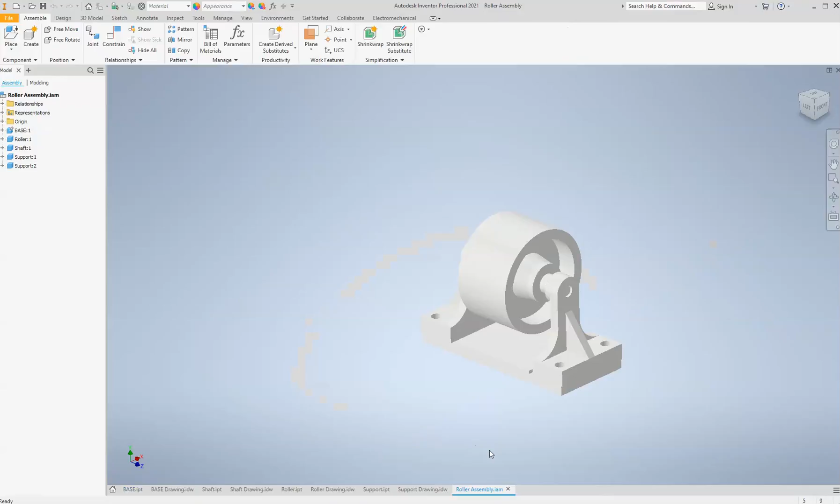We will start with the base of the piece, and we will make a 3-view drawing of this. Then we'll do the shaft, the drawing. We will do the roller, the drawing for that, the support column, the drawing for that, and then finish by assembling it all together. And this will all be done in Autodesk Inventor.

Okay, so we will start here, from the home page. So whenever you open up Autodesk, this is what you'll see. You want to go to new.

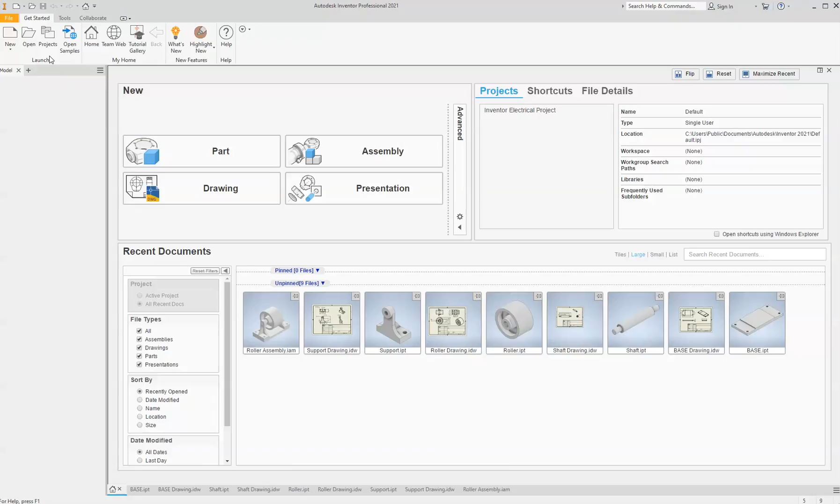To draw a part, you want to use just the standard IPT. The sheet metal has different functions that are not necessary for anything you'll be doing in your class. So whenever we go to assemble everything together, we'll use assembly drawing. Whenever we make our 3-view drawings, we'll use an IDW file.

Okay, so we'll start with standard IPT. You just double click it to open it up. So whenever you first open up an IPT, you'll see a blank workspace here.

The way you want to start most things is you start a 2D sketch. So then you want to select the plane in which you will be drawing your sketch. So the way we will do this is we will start by drawing this face and then extrude it out here and then add 4 holes.

So if we go back to our new part, we will start right here onto this plane. You see it highlights the plane you want. Click it. Okay, so then it takes you here into sketch mode, and you see that it automatically moved us to the sketch settings.

So we want to start here. We will draw a rectangle here that is centered around the origin. To do this, we can go to our rectangle and our drop down tool. We want to start from the center.

So this one, what it will do is allow you to click the center of your rectangle where you want it, which is where the origin will be, and then you can drag it out. And now here you can type in your dimensions. As you can see, it's highlighted that one, and you just press tab to do the other dimension. But we'll just click it down so we can show the dimension tool. So it will just create a rectangle like this.

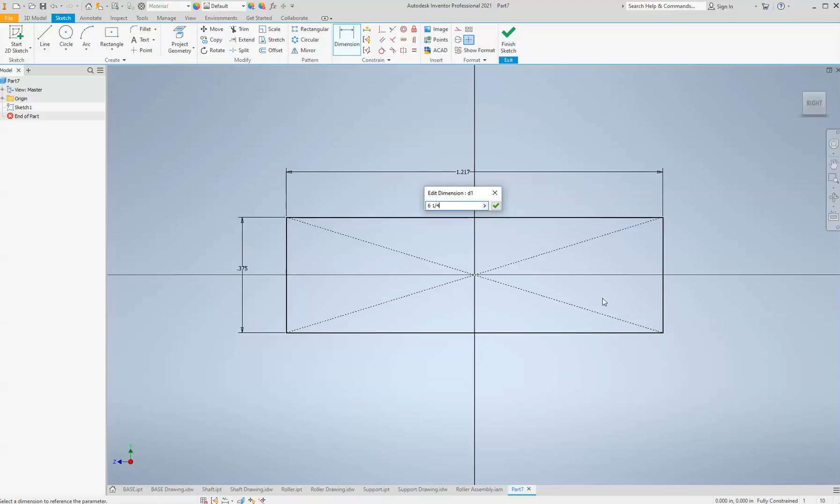This is 6 1/4. So you use the mouse wheel to zoom in and out, and then you hold down the mouse wheel to pan around. Okay, so this is our first square.

Now, what we want to do is add another rectangle on top of this, like this. So now, this will be this piece right here. You can see we're drawing this in right now. We already have the base of it drawn.

Okay, so this dimension here is 3 3/4. And you can do math inside of these dimension tools, as you'll see a lot during this video. 1 5/8. Here's our total dimension. Now, as you can see, it is not centered on this top rectangle.

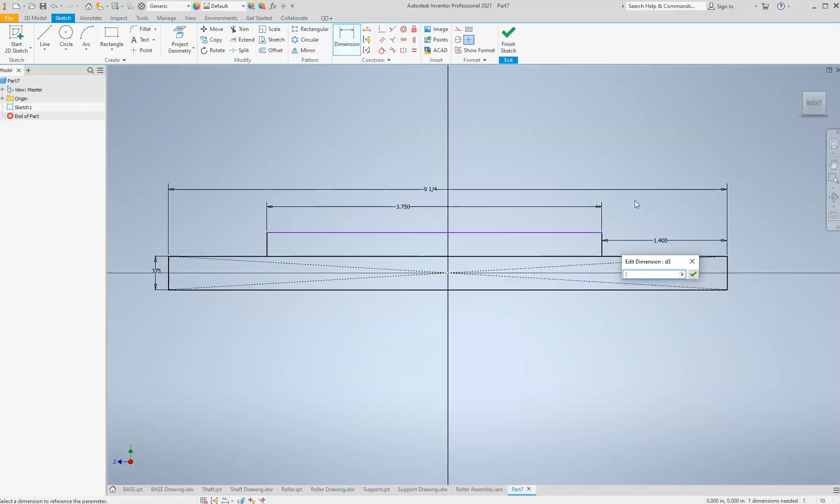So what we can do is we want a dimension from here to here. And here's a very useful function. So like I said, you can do math. You can also do math dependent on other dimensions. So we want to say that it is this dimension minus this dimension divided by 2. Now it is centered on this. And now we just need one more dimension right here.

This is a 1/2 inch, but it's not. It's 1/2 inch minus 3/8.

There's the height. Now, one last thing we want to do is trim out this line that is in between them. So we go to the trim tool, and you can see it will highlight in a dotted line what you will be trimming. So we trim that, and remember there were 2 rectangles there, so there's 2 sets of lines. Just click it again.

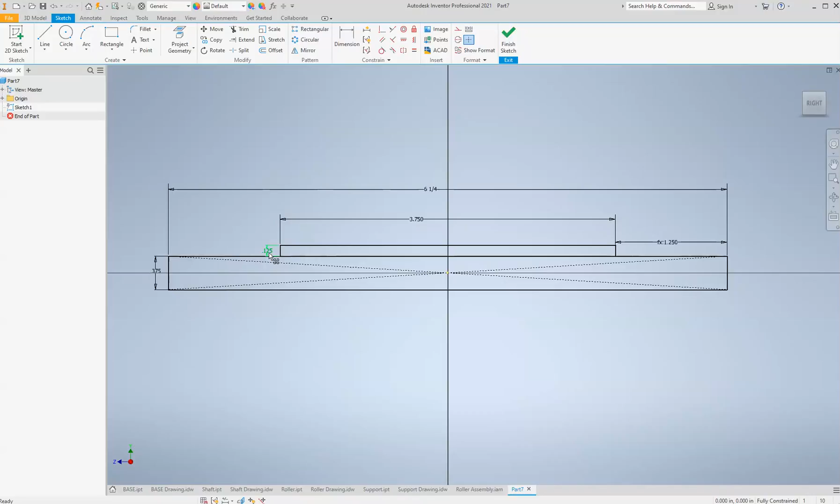Okay, so we cannot do that because we have a dimension dependent on it, which is this dimension here. So if we go ahead and trim this first, then it will go away, and we can dimension this again between there. All right, so then we just click Finish Sketch, and you'll see it'll zoom in on us. If we just zoom out, it'll be fine. We extrude now. This needs to come out a distance of 3 1/8.

Now you can see that we are pretty much done with this one. We just need the 4 holes, which is very simple. So we will start a new sketch on this face. We will add 4 points. Actually, no, we will add 2 points here, and then I will show you the mirror tool.

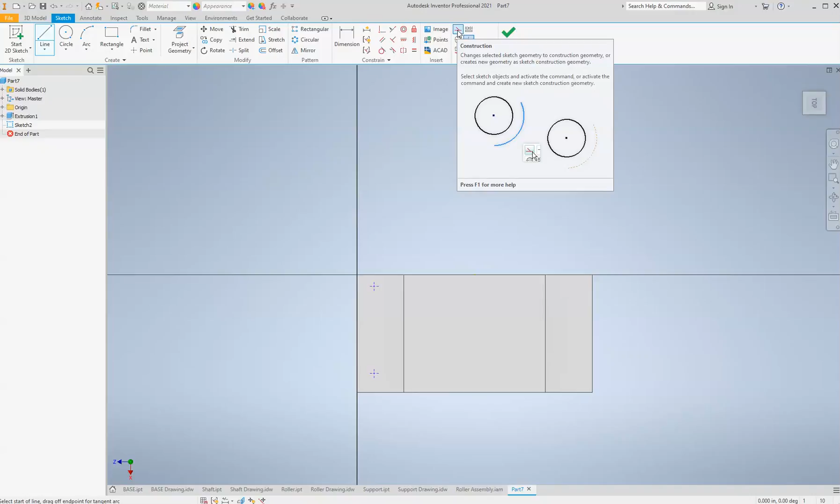So what we will do is we will draw the 2 points here and put them where they need to be, and then use a tool called the mirror tool to just copy them over to this side. And we need a line to mirror them about. So this marker right here is called the construction tool. What it does is it makes any line or circle or any shape that you make not applicable to the drawing. It's just to help you with dimensions.

So now, since we're on this, we can't see it. If we hit F7, or we can go to View and Slice Graphics, what that does is it just cuts to the plane that you were working on. So you can only see the plane you were working on. So now we can see it's a dotted line. That means it is a construction line. This means you cannot extrude or do any 3D shapes off of this line, but it is for dimensioning or for mirroring these parts.

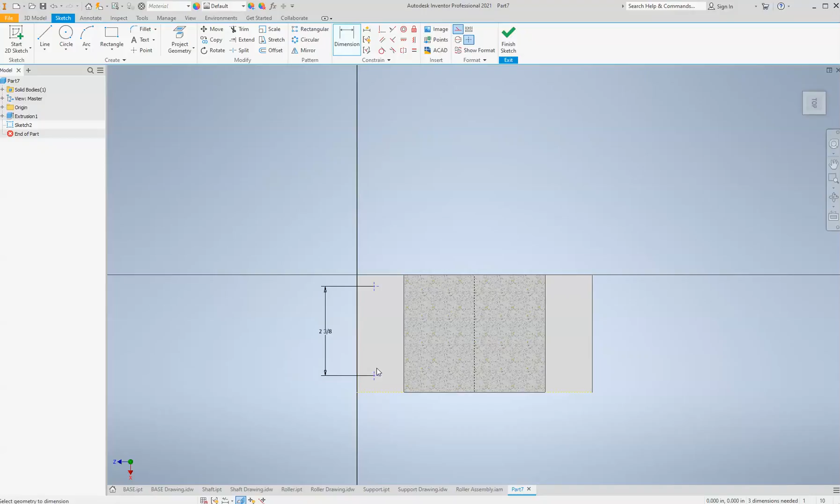So now we want to dimension the size between these holes, which is 2 3/8. And once again, it will not be centered. So we want to just put this line down. And so now what a driven dimension is, it means that we can't edit it, but it is a true dimension. So it'll put it in parentheses. That means that this is not a dimension you can change, but it's a dimension you can reference.

So now, another thing that you might notice is that it is possible that whenever you put this dimension on, these dots were no longer in line with each other. What you can do in that case, you can see that we are looking from the top. The top is over here. So we need to

use the horizontal constraint tool. So all these are constraints. They just make it so that your lines and dots can't move in certain ways. So we want to use the horizontal. We'll click this dot and this dot. What that does is make it so they always have to be in line with each other along that axis. Okay, so now we want to make sure that these are centered.

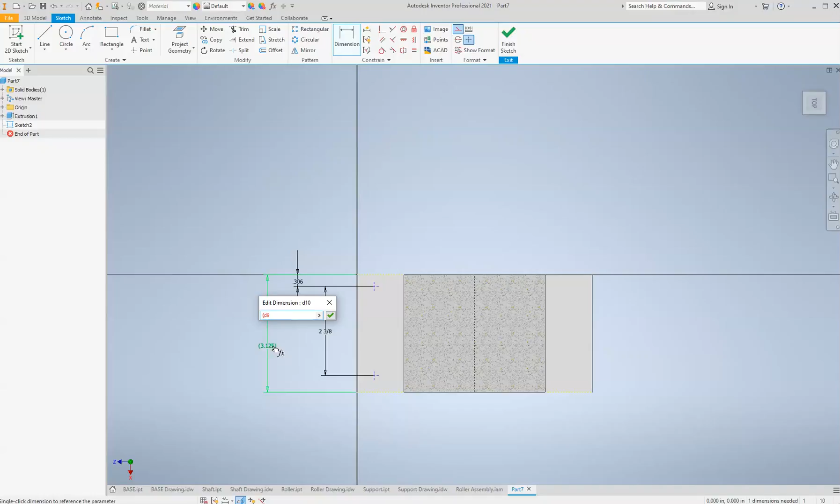So just like we did last time, we'll put parenthesis, this minus this divided by 2. Okay, and now the last dimension we need is from here to here, which we will just make equivalent to this.

Okay, so now the last step we need to do in the sketch is mirror these over here. So if you hold Control and select both of these dots, it will highlight both of them as you see. We can go to the mirror tool, which is right here. And now, since we already have these highlighted, they're already selected, we do not need to select anything else. We go to the mirror line, and that is the line we drew in the center earlier. We click that, and then you click Apply, and you can see that it moved these guys over here.

Okay, so now we finish the sketch, and we use the hole tool. So you can see it pulls up. It automatically selected them. If it didn't, you would just use the input geometry and select the points that you wanted to do. We do not have a seat or anything, so we're selecting no seat. We want to go the whole way through. So it's a simple hole, the whole way through here.

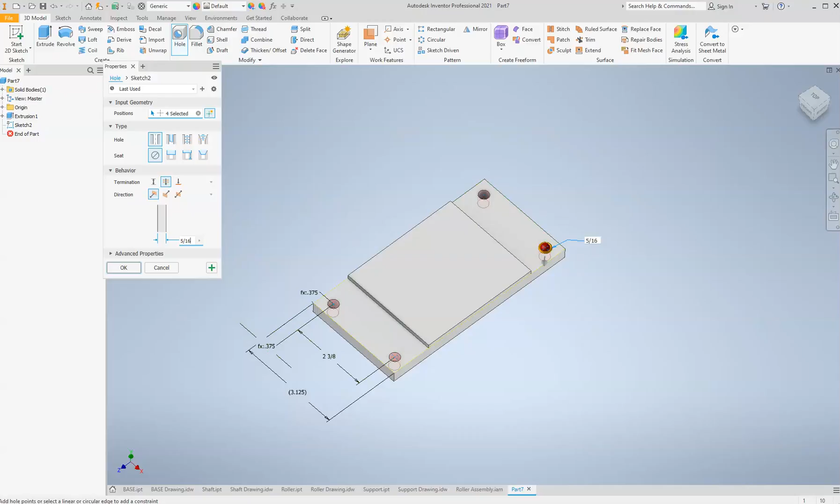Otherwise, you can tell it to go down a certain distance. You can tell it to go to a certain plane, but we are just going the whole way through. You can change the direction in which it is traveling. You can make it go both ways. We're just going straight down here. And this hole size is 5/16. You can see it automatically updated all of them. You click OK. And there is our first part.

So now we want to save this. So you go to File, Save As, locate the folder in which you wanted to put this. We are just going to create a new folder. Okay, go into this, and we will call this the base.

Okay, we'll call this base inventor. Just double check that it is saving as an IPT file. You want to click save. Now you see it updates. This part is saved. It is now saved.

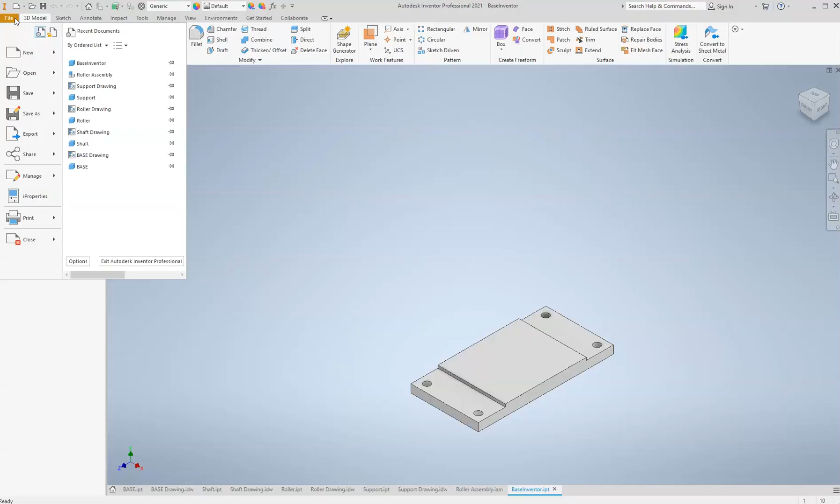So now we want to do a drawing of this. This is how the drawing should look. We want to have three views, since the three sides are all important, plus an isometric view.

You want to go to File, New, and now this is an IDW drawing. You'll double click this. Now you can see that this paper size is too large. It's using size D, but we need to use size A.

So if you go over to the sheet and right click on it and go down to Edit Sheet, it'll pull up a menu. You can change the orientation of the paper, you can add the revision, like if you revise a part several times you can change the name of it. But all we are interested in is the size. We want to change it to A.

Now you can see it makes it smaller. So now we want to place down our views. We click base, and this will pull up the last drawing we were using, which is base inventor.

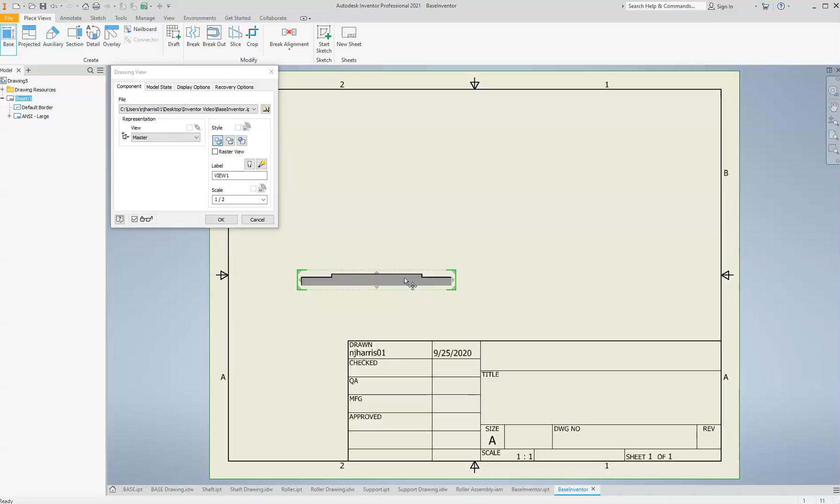Now this is doing it from the front side, but I think it will look better from the left side. So we just use this cube to locate the side of the drawing we want to look at. You just pull your mouse above it, click it down, and it'll do that view, this view, and the isometric view.

It's that simple. So now you click it down and you want to put dimensions on it. You go up here and select Annotate, and now you can see there's a lot of options here on how to do it.

You have a specific one for holes, so let's use that one. This only works if you used the hole tool. If you extruded a circle through this, you cannot use this tool.

So we just click that and place it down. Now, to indicate that we used this for all four holes, we just double click onto this thing here and it'll bring up the menu for everything. We can just say 4 times. So now what that says is that there are 4 holes at this dimension, and they're cut all the way through.

Okay, so now we can place some dimensions on here. It's the same idea as the sketch before. You just click the dimension, click the sides you want to dimension. This will bring up a little window where you can add tolerances and stuff, but for this we're not going to worry about that.

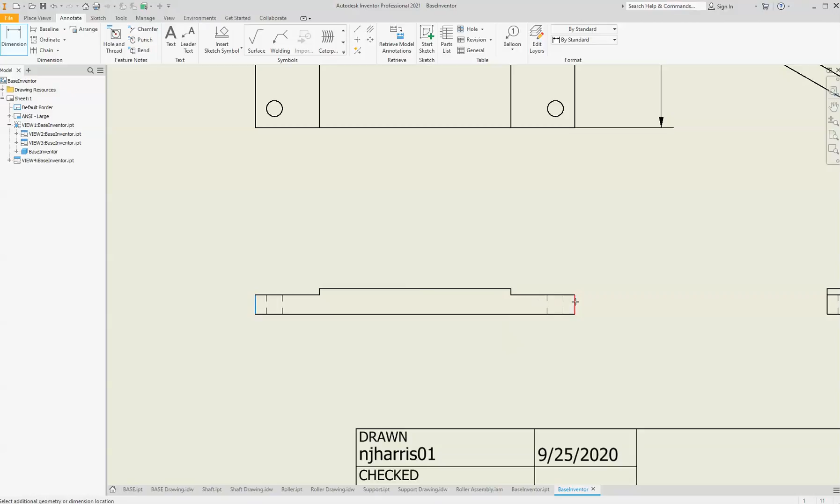I'm not going to spend the time to dimension everything, but I will show you the center line tools, which are very important in drawings. Whenever you have circles, you want to use the center mark, and you just click the circle and it'll put a center mark on it.

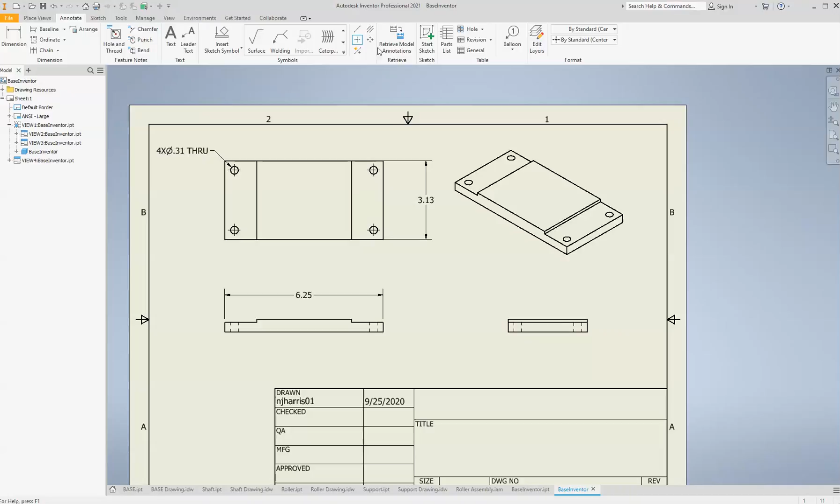Then down here, where you can see the holes are shown, you want to use the tool that puts a center line between two lines that you choose. So we zoom in, click this line, and it'll put a center line through. You would do that for all of them, or anything that is symmetric, you want a center line.

I will not walk you through every dimension that you need, because it depends on each drawing. It's also a little personal preference of where you put the dimensions.

Okay, so next we will be doing the shaft. If we look at our main assembly, this one is what holds the roller in place. It's right here.

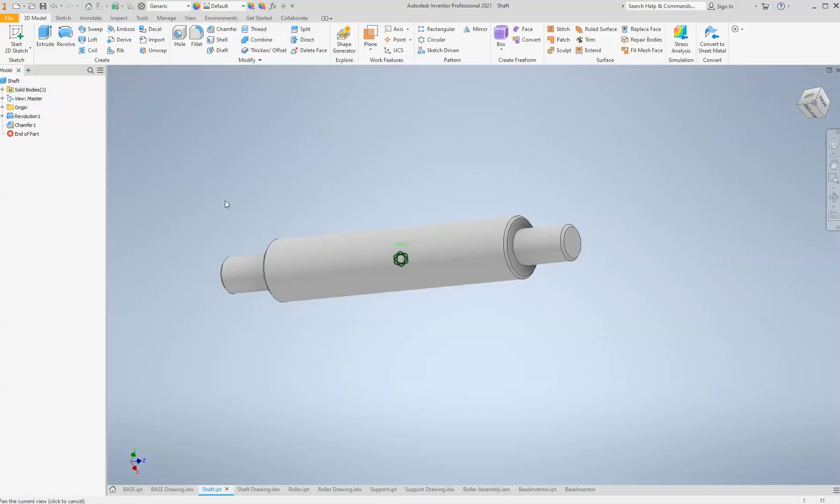So that brings us to this. We will build this next. It almost looks like a little rolling pin. To do this, what we will do is take a cross section. I'll show you.

So we will draw this cross section without the chamfers, which are the cuts out of the sides. And then we will use the revolve tool to make that plane circle around and make our whole object.

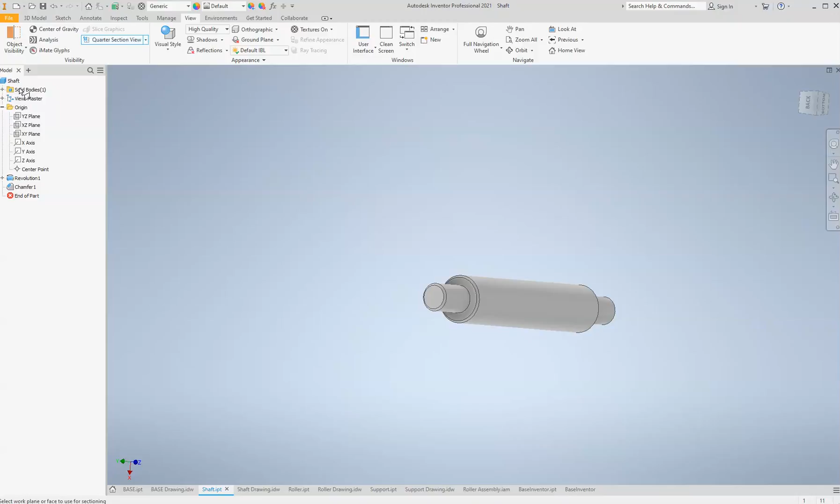So let's go to File, New again. We are doing a standard IPT file. So we will start a sketch along this plane.

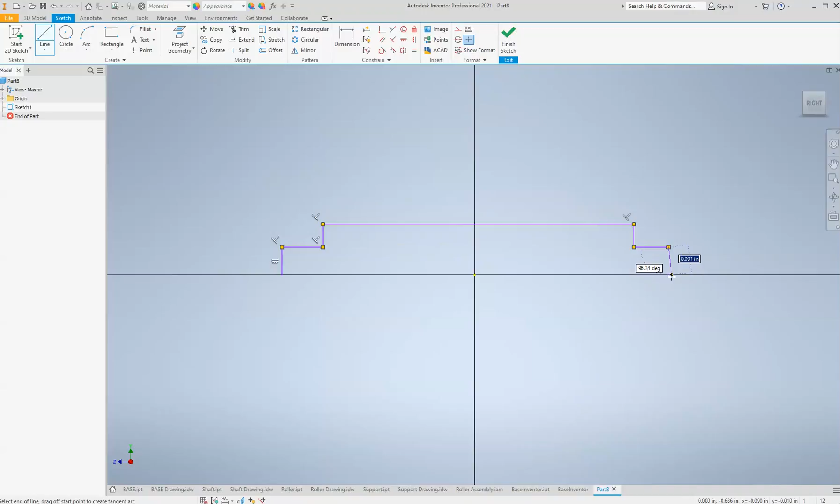So now we need to draw a shape like this. But a shortcut so you don't have to dimension this entire thing is we will just draw this section of it, and then mirror it over this line.

So to start, we will put a construction line along the vertical axis as well as the horizontal axis. This is for referencing later.

Now we want to make sure you leave construction mode, otherwise you will not be able to revolve or extrude anything you make if you are still in construction mode. So we will start with the line tool.

We'll start here, and we will come out a distance of 4 3/4 divided by 2. That is the total length of the shaft divided by 2.

And now we will come up a distance of 7/16 divided by 2, which is 7/32. Again, this is the smaller diameter of the shaft in half.

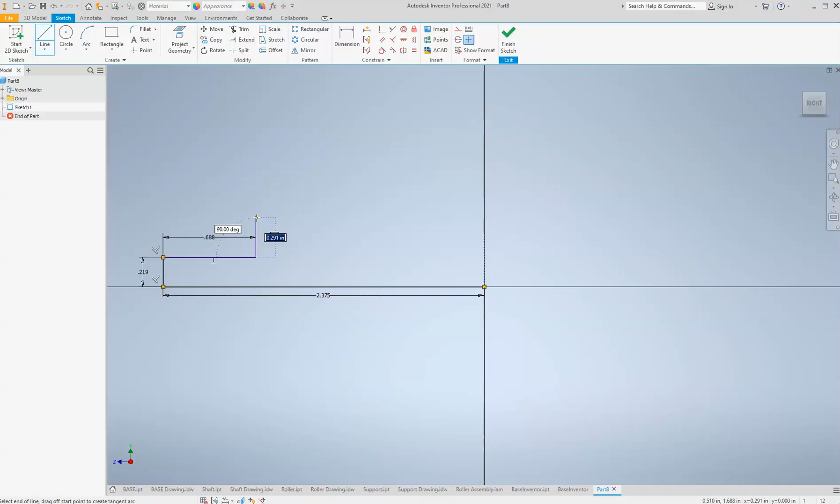Okay, and now we will come in a distance of 11/16, and then come up a certain distance that we will define later, and then finish it off back at the vertical axis.

So to dimension this line, it would be simpler to dimension from this distance, because we know the total diameter of the shaft, which is 3/4 divided by 2 would be 3/8.

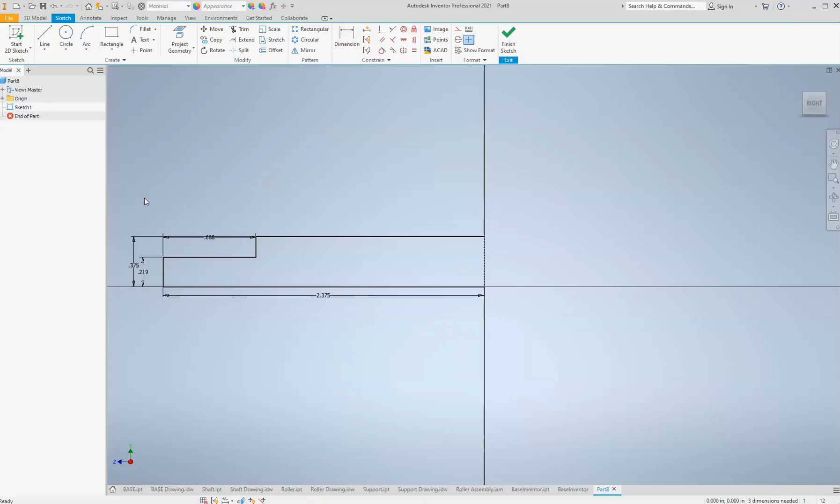So now, in order to mirror this, we will highlight these points. If you drag from this side, you'll see it's red, and that'll deselect items. If we select from this side, either way, it'll select items that are being highlighted.

So we select all these, we use our mirror tool. We select the mirror line, as we have already selected all of our points, and apply.

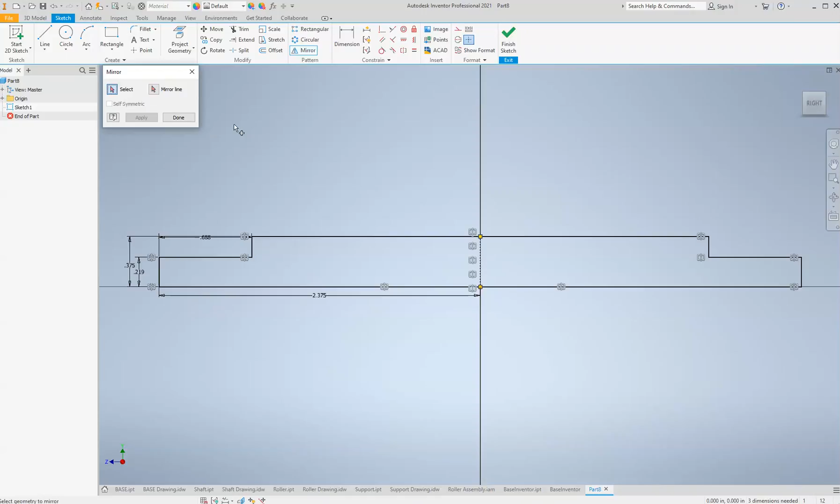So now we will finish the sketch. We will choose revolve, and you see it already selected the plane. If it did not, you click this and select the plane.

If for some reason it can't find the plane, go back into your sketch mode and just make sure that all of these corners are connected, and at all adjoining points, everything is completely connected.

So now we need to select the axis to revolve around, which is here. You can see it made our part.

Okay, so now the one thing we need to add are chamfers here, here, here, and here. This is very simple, it's just a tool. You select each of the corners you would like to chamfer, and then you would change the dimension.

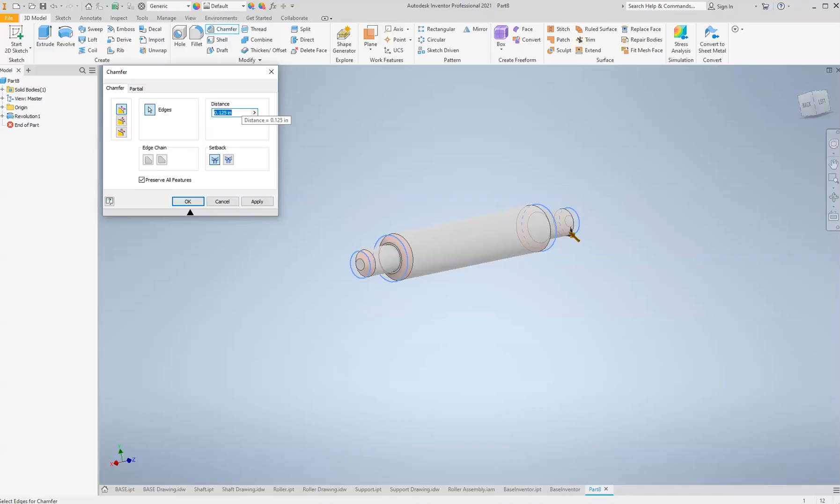I believe we used 1/8. Now you can see the shaft is built.

Okay, so now we will save this part. This is Inventor. Save.

And then for this part, when we move to our IDW drawing, don't forget to change the sheet size.

So now, as you can see for this one, if we were to do a 3-view drawing, these 2 views would be the exact same since it is just a cylinder. So this view is unnecessary, we can just have 2 views.

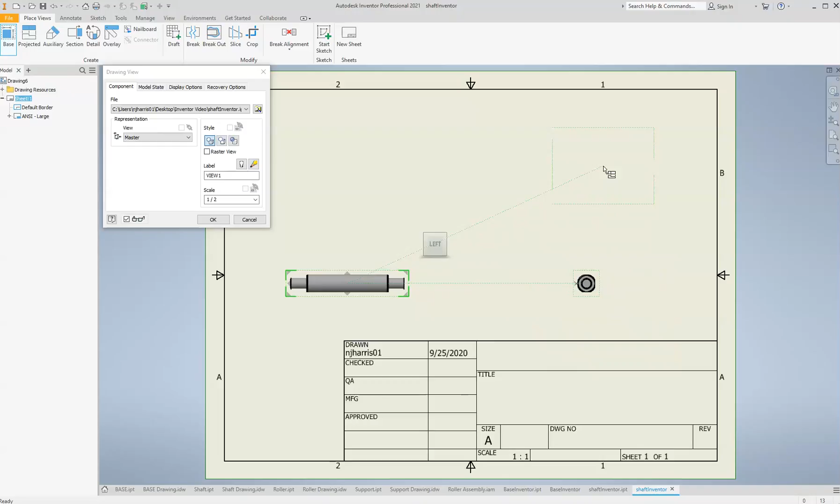And then the isometric view. So now what is nice to do in these situations is to change the scale size for this, as there's a lot of white space on this page.

So if you double click this, it'll bring up this view. We want to change this, use the drop down, change it to 1:1. And you'll see whenever we click OK, it'll automatically update this view. This view should remain the same.

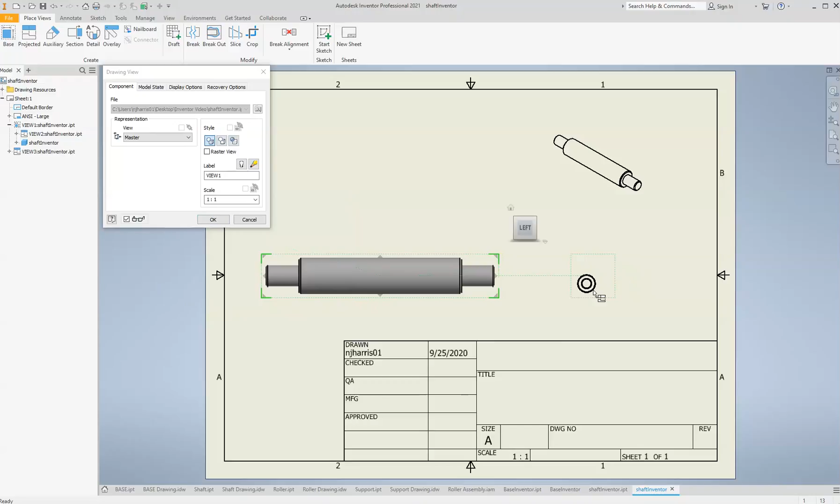Okay, so now again this will just be dimension. You want to start with center lines on this. Whenever they are not long enough, as you can see, you can grab it and extend it. You want a center line on this.

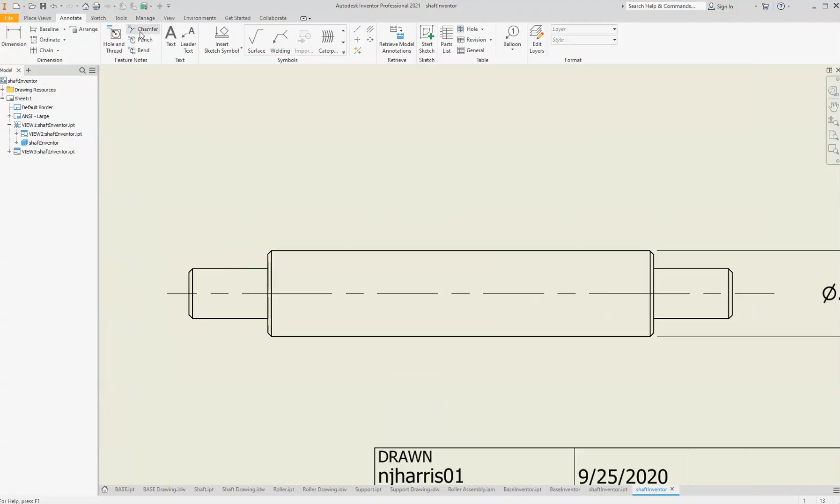Now whenever you go to dimension this, you will want to indicate that it is diameter, which this already has, as you can see. And whenever you go to show the chamfers, there is a chamfer dimension tool. You click that, select the chamfer, and select the axis or the other line, and it'll automatically make it a chamfer notation.

Okay, so now our next part we will be building is the roller. As you can see in the assembly, this is the main part, where a belt could be on to roll around. This one is more complex of a part, but we will follow a very similar idea as to what we did last time.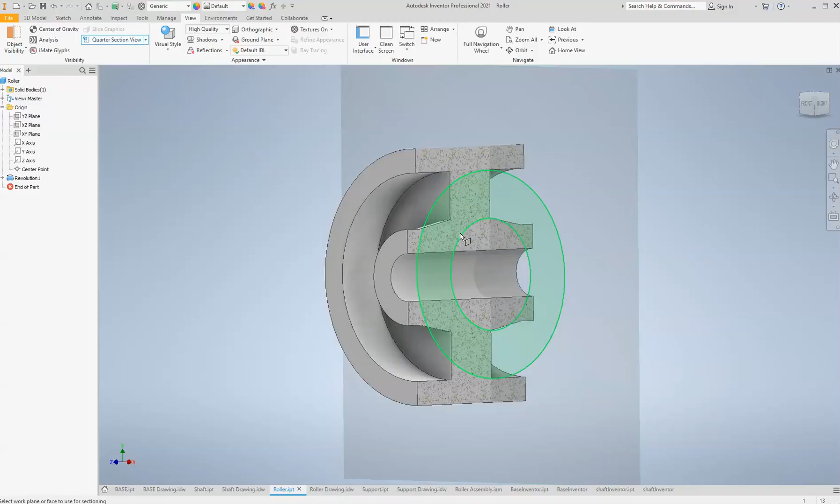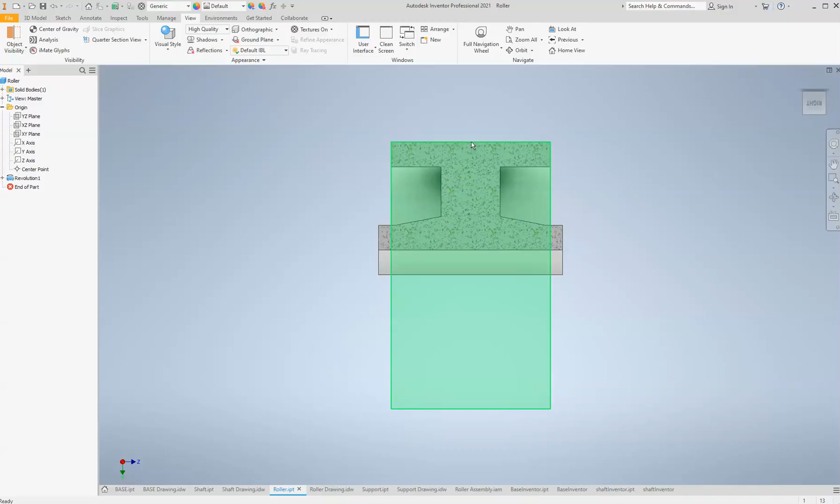So again, I will show you the section that we will be drawing around. We will be drawing this here. This will be our vertical axis. We will draw this part of it, and then mirror it over and revolve it about the central axis here.

Okay, let us begin. So we will go to File, New, Standard IPT. We want to start a new sketch again. We'll go about this axis.

Okay, and again we will start by adding a construction line along the vertical axis. We will zoom out some so that this can be larger. And we will draw a line along the horizontal axis.

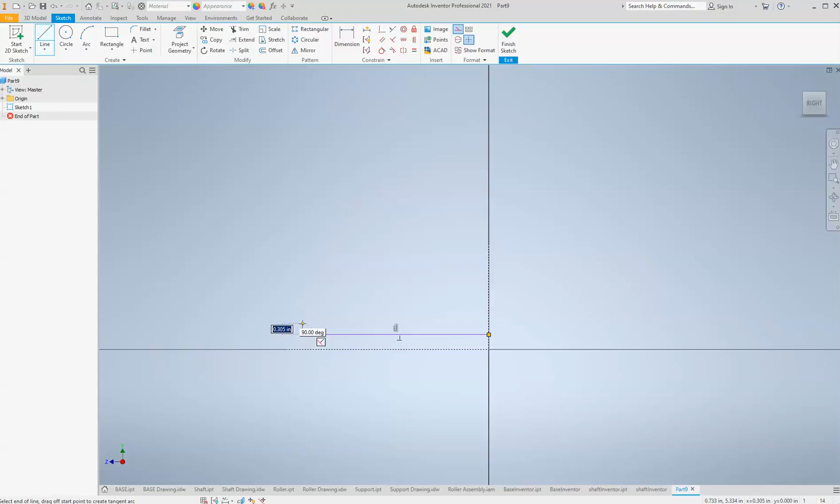Now this will be the point at which we will rotate about, is this line here, and it is hollow in the center, so we will come up a certain distance. It will come out, it'll go up. As you can see, I forgot to exit construction mode, so if you do that, you can highlight all the lines you did and unselect that, leaving construction mode.

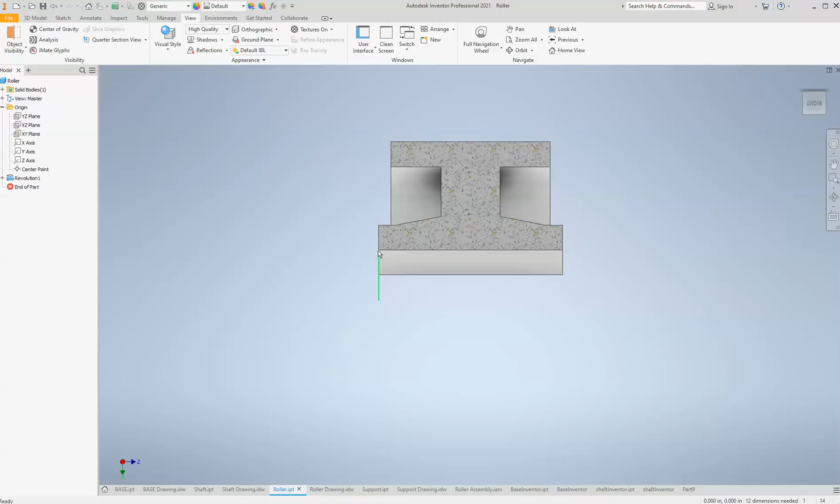Okay, so now the line will come in, it will go up like this and like that. So now, just to be very clear, what we have drawn here is this shape right here.

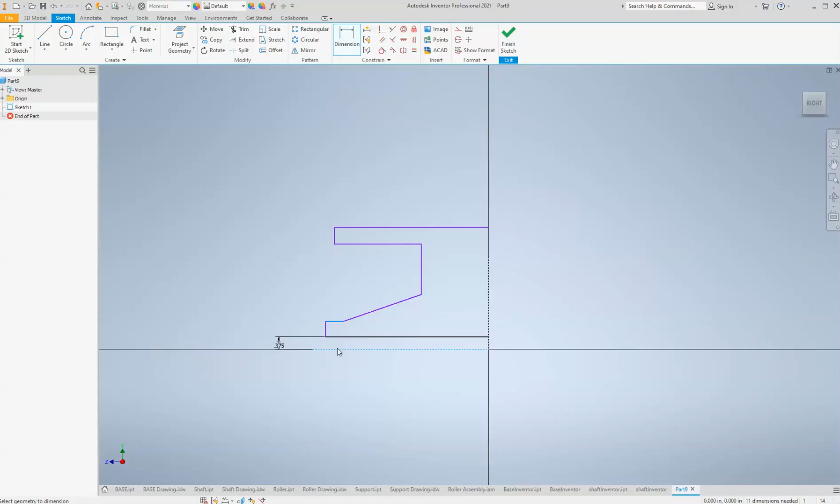All right, so now we will enter our drawing again. So now we need to dimension this. We will dimension this direction first. This diameter is 3/4 of an inch, so we will call it 3/8. This diameter here is 1.5 inches, so we will bring that to 3/4.

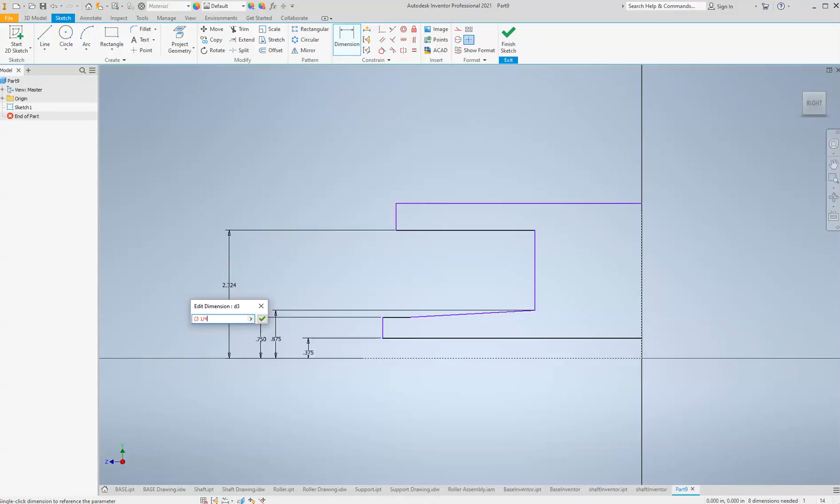This diameter here is 1 3/4 inches, which you can just divide by 2. And this diameter is 3 1/4. And the last diameter is 4 inches, so 2 inches.

So now this total distance here is 2 3/4, which we will need to divide by 2. And as you can see, that has made some weird errors happen, but it will solve itself.

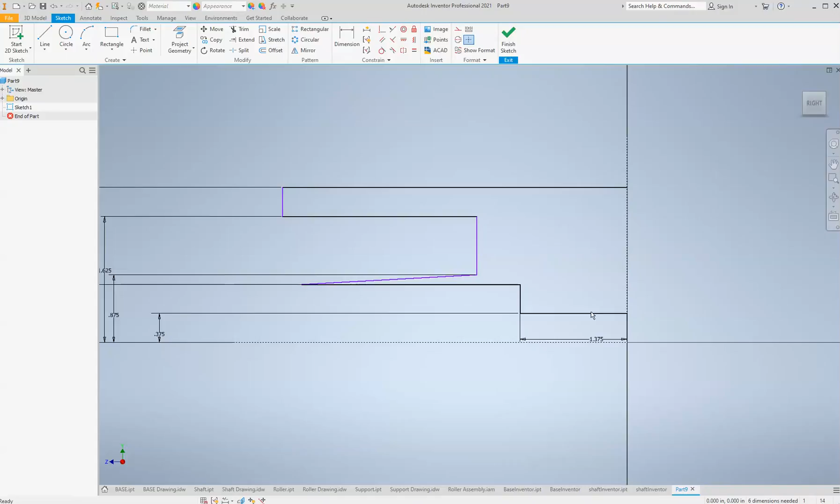When we dimension this, so no, it will not. So what we need to do first, to know that distance, we need to put this distance in here now. And we'll start with the outer diameter.

Okay, so this will be 2 9/16 minus 3/16, divided by 2.

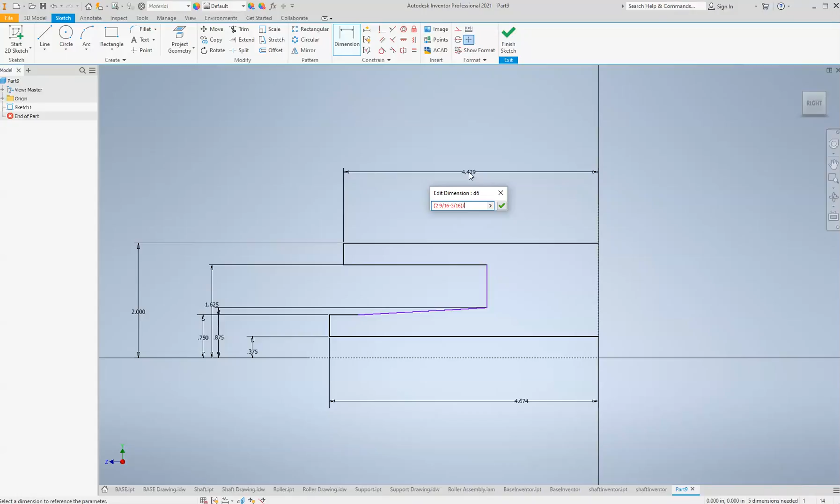So this dimension was put in wrong. Oh, this dimension was not done yet. Okay, so these are some issues you run into with doing sketches. Sometimes the lines will not agree with each other if you draw it too big at first.

So we need this dimension here, which will be... Okay, so the dimension I have is from here to here, which will need to be 15/16. And then this dimension will need to be 2 3/4 divided by 2.

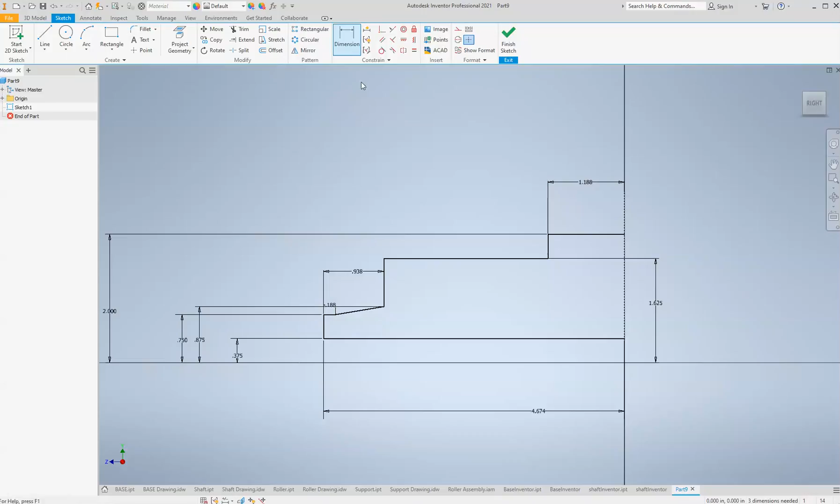And then we will need to fix this dimension before we can do that. So this dimension here is 3/16. So now we will end with this dimension.

So that might have been confusing, but as you can see, there's the problem solving process you need to go through. So whenever it is not working with you, you need to just go back a few steps and try again.

Okay, so now we just need to mirror this over. So again, we will highlight everything, mirror across this line, apply. We will finish the sketch, and we will revolve. Again, it has already selected the profile, we just need to select the axis, which is here. And as you can see, we have drawn our roller.

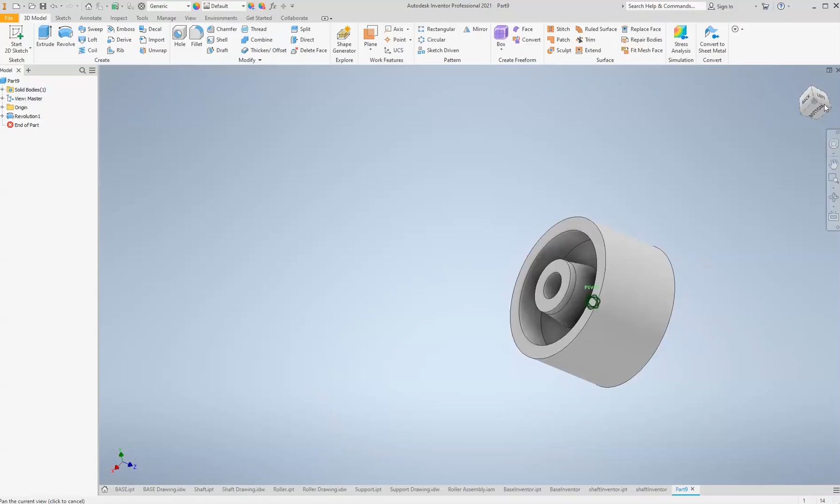Okay, so now we will save it.

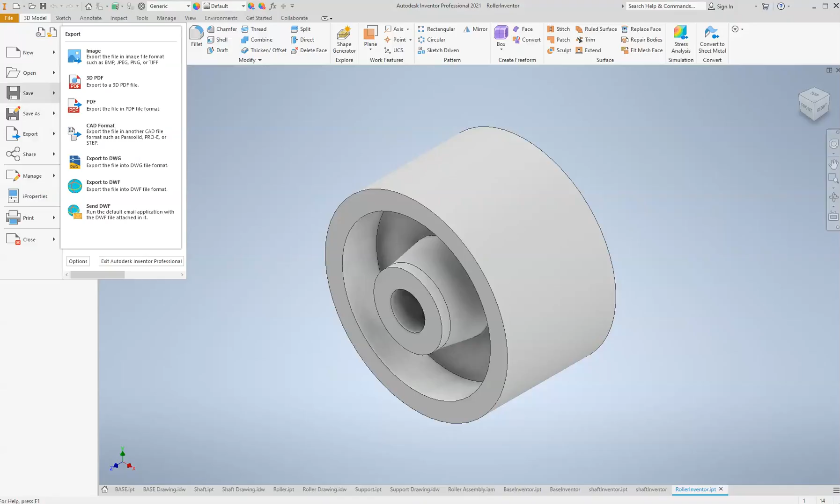We will start a drawing for it. We will change our sheet size, and we will need to place this down.

Now again, as you can see, these two views will be the same, so one of them is unnecessary. And then the isometric view.

Okay, now something that would be very useful for this drawing is what is called a section view, which cuts a certain section out and shows you. So what you need to do is select your section tool and then select the drawing where you want to section.

We'll have it on the center of this, but you don't want to click right here. You want to go just above it to make sure you capture everything. You come straight down, right click, continue.

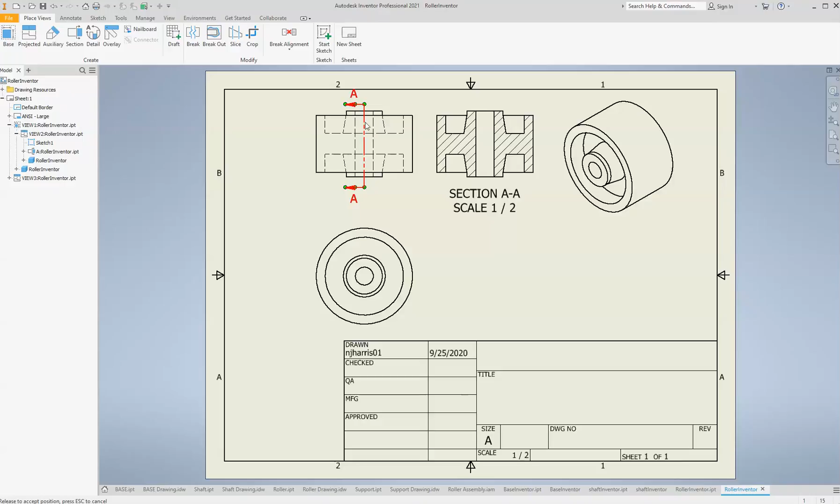Now what you can see is it draws these lines to indicate where the item is being cut for the section, and then this is your view. It labels the section to what it is. So now you would do all your dimensions off of this.

Again, I will not lengthen this video by putting all the dimensions in. This is a skill that you really need to develop yourself over time. Just put the dimensions that you think are important, and we will discuss it in your meetings.

Okay, so now we are on our last part, which is the support. As you can see in our assembly, this is this piece here, both of these pieces. It is what will hold the roller and the shaft up and sit on the base.

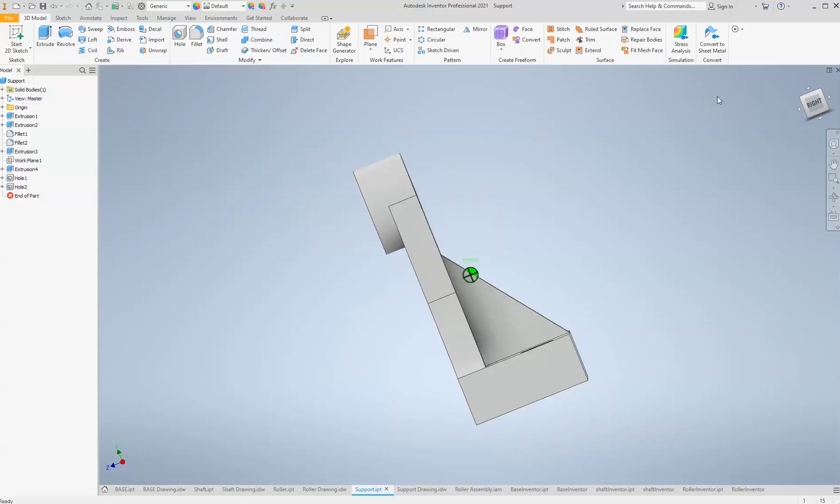Okay, so this shape will require more steps than the previous ones. As you can see, there's no simple way we can build this with one operation.

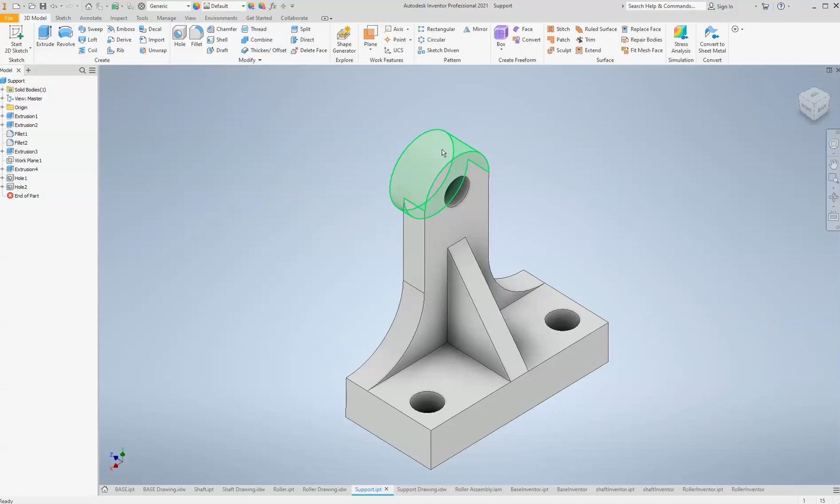So what we will do is draw this base without the holes, extrude it up, make this a rectangle right here. We will add these fillets in and fillet this to round the edge. We will add this circle out without the hole, extrude it out, and then we will add this gusset in here, and then add all three holes.

Okay, so we will begin by starting a new IPT file again. Start a sketch, and we will do this one on the bottom plane as we will start from the base. So now, again, we will start with a center point rectangle.

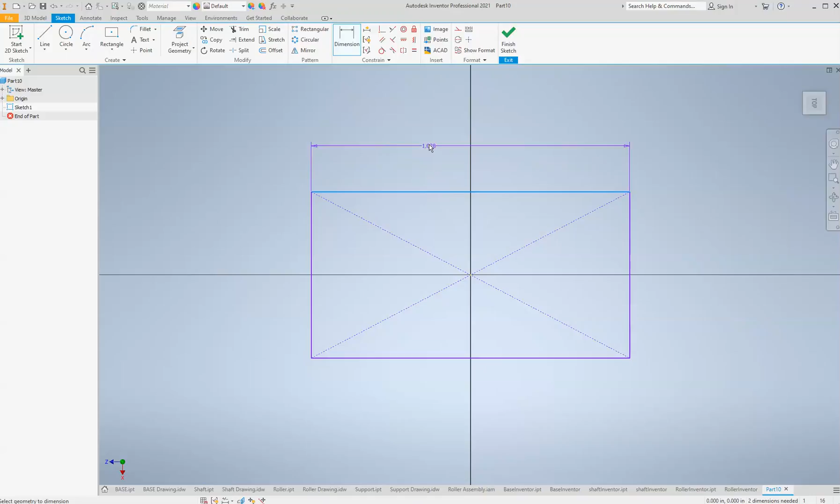We will come out here, and now we will dimension this one. So this is 3 1/8, 1 1/2 inches. Sketch. We will extrude this piece up a distance of 5/8.

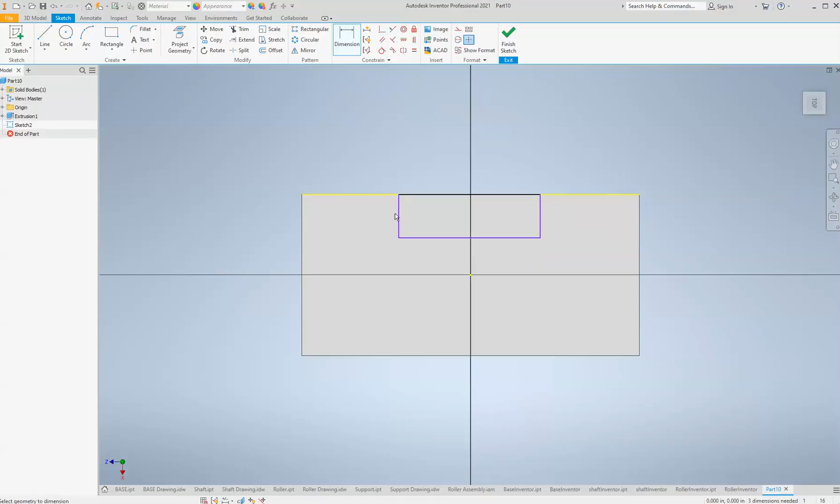And we will start a new sketch on top of this plane, where we will use a 2-point rectangle starting from this edge. We will dimension this to be...

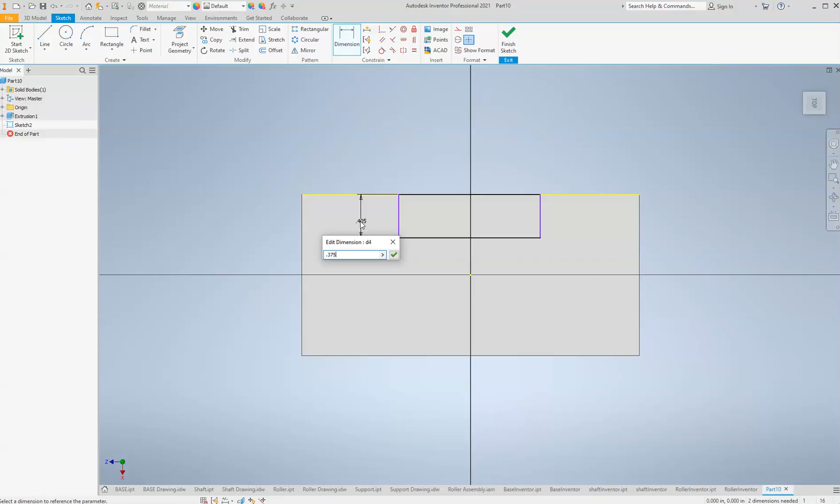Excuse me while I give the dimension for that thickness. It will be 0.375. We will need this distance, which is 1 1/8.

Now we will need to center this once again. So we will find the dimension for this, except that is a driven dimension. Again, this just means we can reference it, but we cannot change it. So now we need to have this distance, which will be equal to this distance minus this distance, divided by 2. Now it is centered.

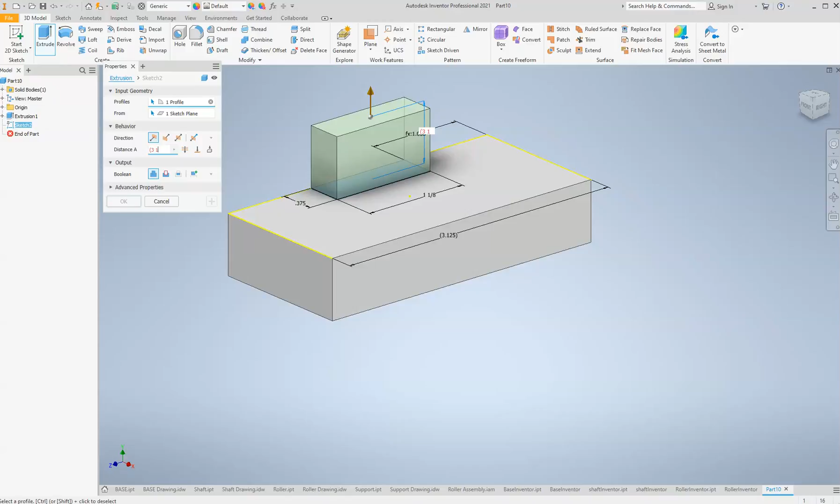So now we will extrude this piece up a distance of 3 1/2 minus 5/8. So you can see it is starting to take shape.

Now the next step will be to fillet. So we will fillet this corner and this corner. The fillet radius is 1 inch. Accept this, hit apply. And now we will round the top edge.

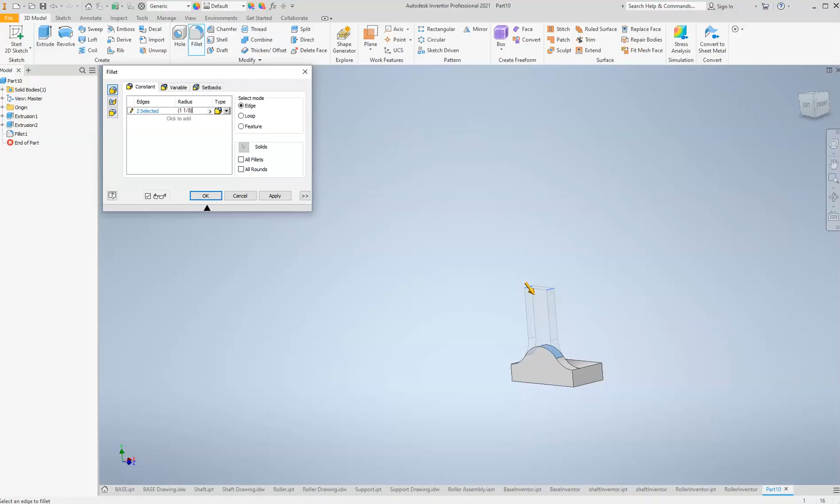Select both edges. Now as you see, it will just cut it down to whatever the radius is. The radius for this needs to be 1 1/8 divided by 2, so that it perfectly rounds the top.

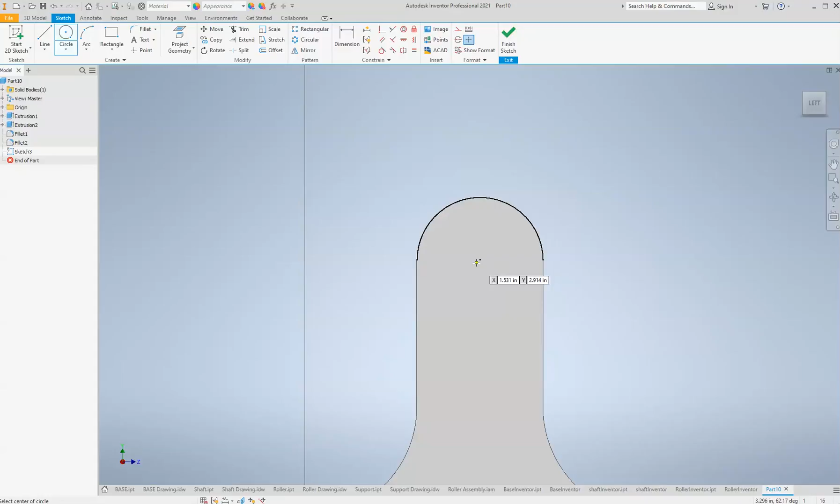Okay, so now the next step is adding this circle. We'll start a new sketch on here. We will use our circle tool, and if we highlight this edge first, it'll show us where the center point of that is. This is where we'll start our circle and bring it out to the edge of this. It should have a diameter of 1 1/8 inches.

We will finish the sketch and extrude this one out a distance of 5/8 minus 3/8.

Now, as you can see, we have this part, the next piece extruded out. So now we need the gusset and the 3 holes. We will start with the gusset.

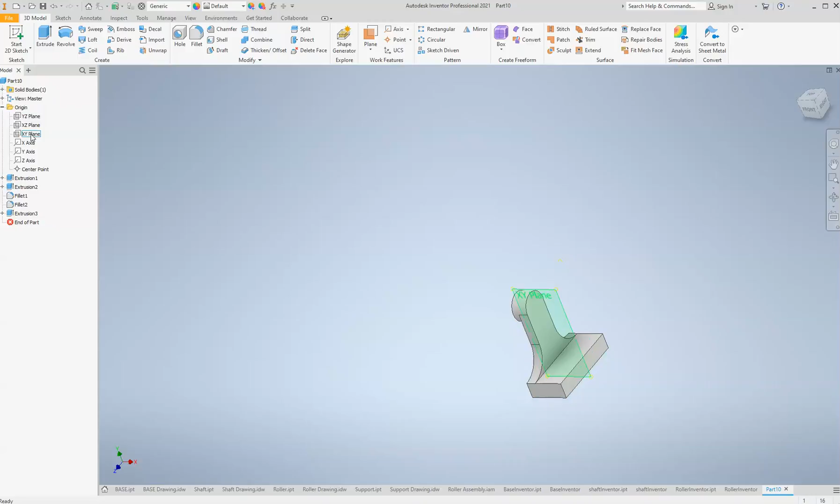If you go here to this folder called Origin, it has all the origin planes for you. If you right click one of these planes and tell it to be visible, you will be able to see it. You can see this is halfway through our part because we drew our original rectangle at the center.

So now we will want to start a sketch on this plane. And again, if we hit F7 or go to View and Slice Graphics, it'll cut it down to the plane we are operating on.

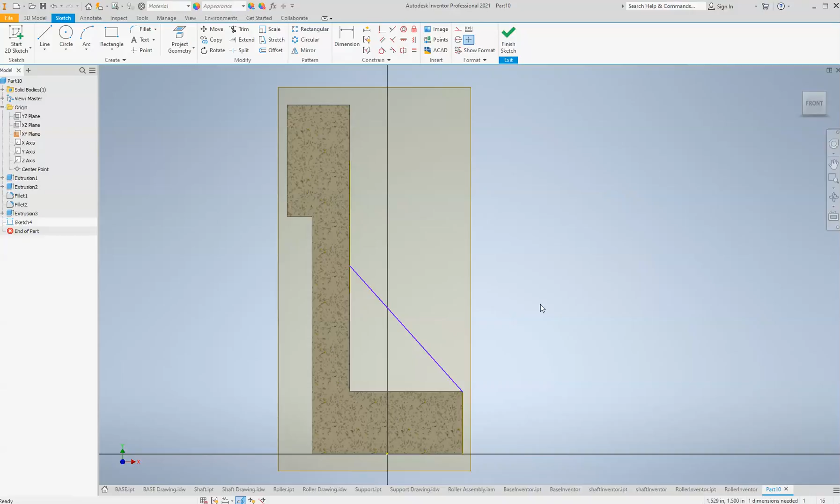Okay, so now we will want to use the line tool. This gusset will go from the edge here to a certain point along this line. We can dimension. A smart practice for pieces like this is if you just place it here along there, and we know that this point needs to be constrained to this point. This constraint locks 2 points to be at the same location, so we can say this one to this one.

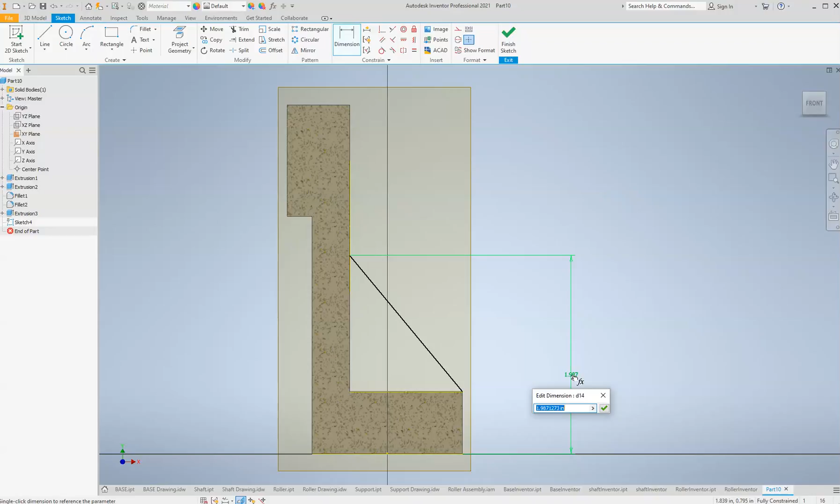Okay, and now we need the dimension that this goes up, which is 2 1/8. And now we need to complete the triangle.

Okay, so now we finish the sketch. We'll go to extrude. We will do a symmetric extrusion, since we are about this line, we want this to be even on both sides. You could also do an asymmetric where you have to define both distances, but we will just do symmetric. This distance here is 5/16.

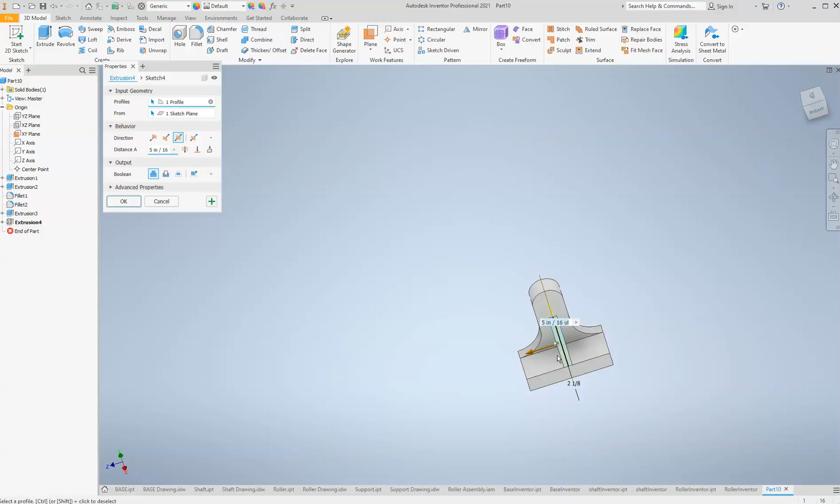The distance you insert whenever you do symmetric is the total distance across the entire gusset here. It is not just from the plane here, it is from here to here.

So now we no longer need this central plane, so we can right click it here, or we can right click it here and turn off the visibility.

Okay, so now we just need our 3 holes. We will need to do this in 2 steps as they are not in the same plane. We can start with this one. So start a new sketch along this plane, add a point at the center of this. I just highlighted that to show where the center is, placed a point, finished the sketch.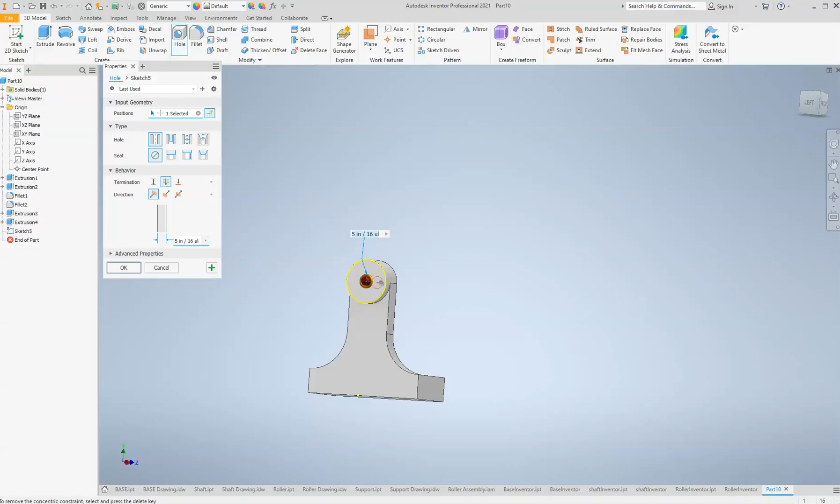Use the hole tool. Again, we have no seat, we have no specialty hole, and we are going straight through. This is a diameter of 5/16. As you can see, we just inserted the hole there.

We will start another sketch on the bottom. Insert our 2 points. We will tell them to be along the same axis again. We will dimension the distance between them, which is 2 3/8.

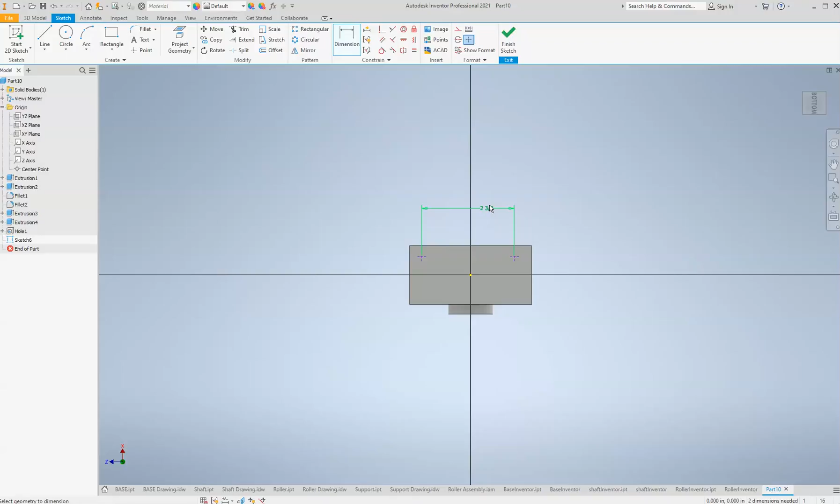We'll add this dimension so we can center them along here. So this will be this distance minus distance divided by 2. It is worth noting that if you are not comfortable with referencing other dimensions, you could calculate what this distance needs to be by hand and just enter it yourself. This is just a shortcut if you are comfortable with it.

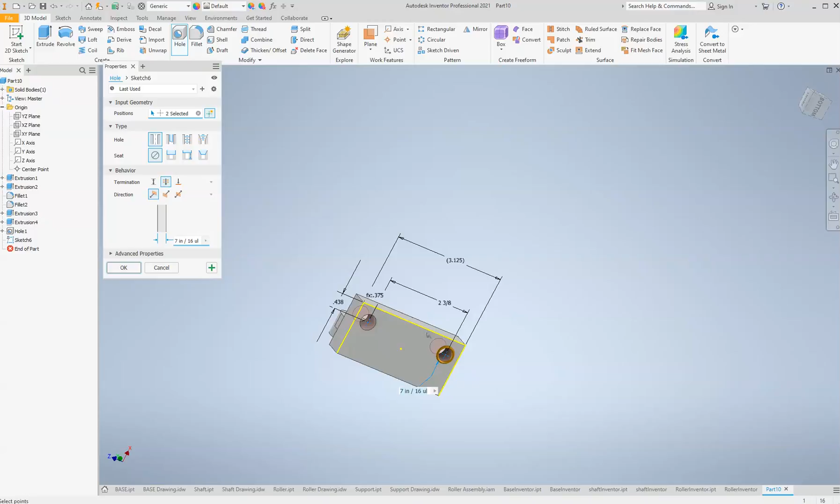Okay, and now we will dimension the distance from here to here, which is 7/16. So you move them both down, we will finish the sketch. We will use our hole tool, and it is again 7/16 diameter going through. So this is already good. We click OK, and you can see we have our support.

Okay, so now we want to save this part. Okay, save. We can start a new IDW drawing for it. Again, change the sheet size to A.

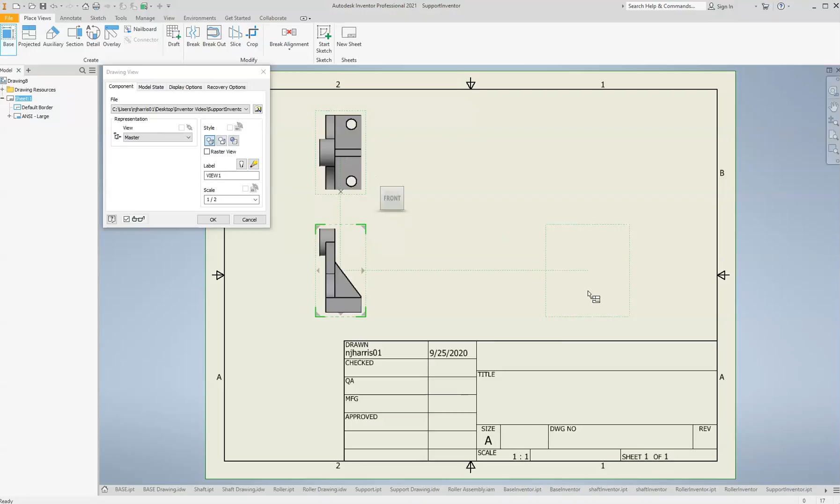Place our base down. So we will want to lower the scale here. And now if you change this after, it will still update everything. So again, you just want to have center lines of the holes and the symmetric parts, and then dimension everything.

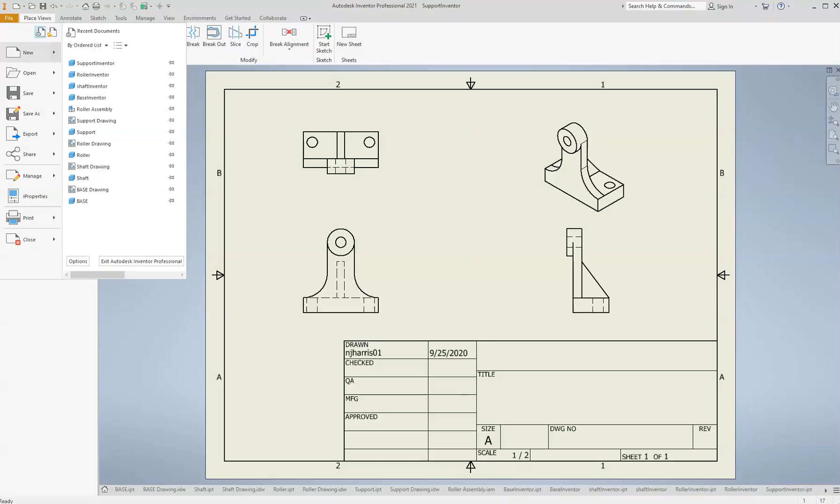Okay, so now we will move into our final step, which will be assembling this into an assembly drawing. So we will go to File, New. This time we will be using a standard IAM file, which is just an assembly. Weldment is similar, but it will use slightly different tools. It allows you to put in information about welds if you're planning to weld something together.

This is not something you will need to do at all in this class, so we just stick with the standard assembly file. Double click it to open, and now it'll bring you to this blank screen.

What you want to do is place the files you have already saved. So if you go to this place tool, make sure you're using just the normal place. The content center is a catalog that Autodesk saves of different bolts and standard components that you can automatically add into an assembly without needing to draw it. This is not something you will need to worry about in this course.

So we will just click place. We will locate the folder that we are operating out of, so Inventor Video.

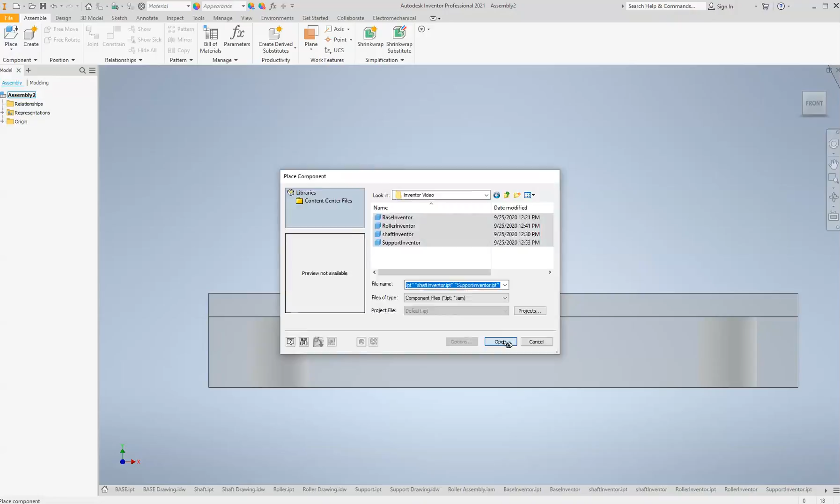You can highlight all of them, or do them one at a time and click open. As you can see, it will place everything down at once. You just click them down.

Now we need 2 of these parts, so we can do this just like any other thing. We click it, control copy, unclick it, control paste. Just control C for copy and control V for paste.

I believe you can also just right click and copy and then paste if you would choose to do it that way. Now what we will need to do is constrain this piece to be connected here, this piece to be connected here, and join this as a cylindrical connection in between these, and this in a cylindrical connection to this. If you do not understand what this means, it will become clear here in a moment.

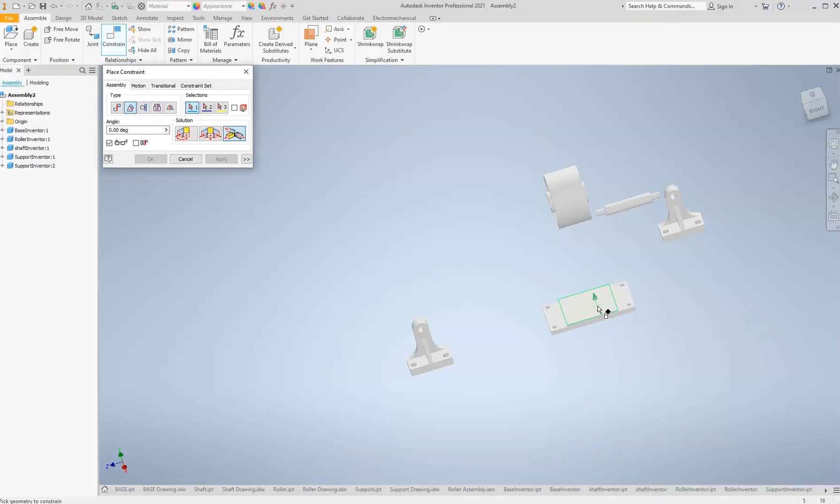So we will start with our constrain tool to place this onto here. There are many different tools. There's mate, which will allow you to take 2 surfaces and connect them together. There is angle, which will allow you to put a certain angle between 2 surfaces. Tangent, which will allow you to connect a cylinder to a surface.

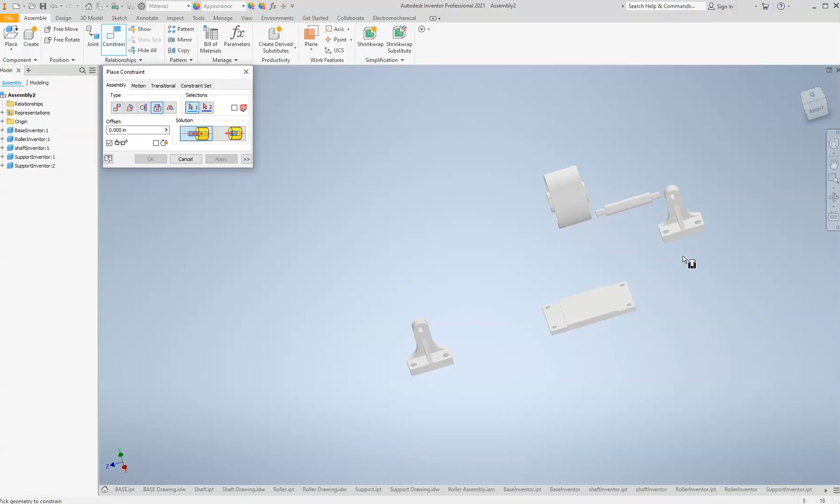And insert, which is the tool we will be using, which will be used to insert a hole, constrain a hole to another hole. So we will select the bottom of this hole and the top of this one, and you can see that it connects them together. Click apply to save it.

Then we will select the bottom of this hole, and the top of this one, and you can see it turns it, and now this one is fully constrained.

One more thing you want to do is take your base part, right click, and click ground. What this will do is prevent you from being able to drag it or move it anywhere, which just keeps your drawing centered at the origin. It keeps the assembly centered at the origin of the workspace.

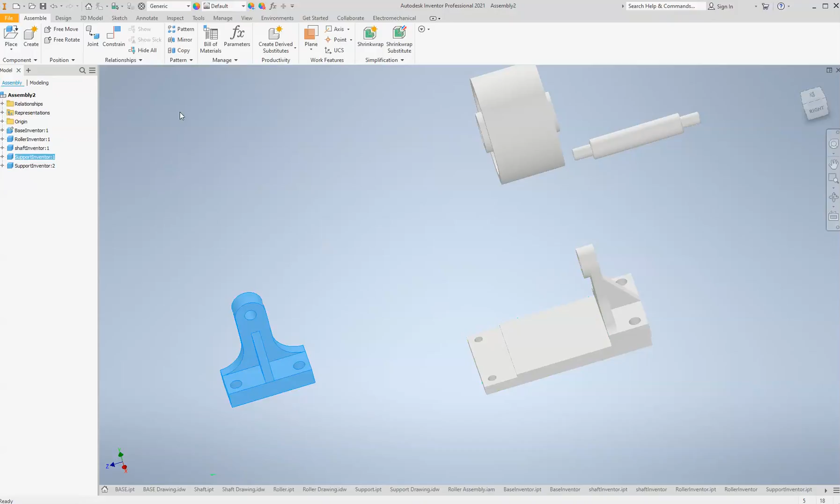Now we want to do the same thing for this one that we did to that. Constrain, insert, select this, apply, select this, apply.

Now we want to do a cylindrical connection between these and this. Constrain will hold something to where it cannot move from that location. The joint tool allows you to do connections where 2 objects are connected but can still move relative to each other in different ways.

There are many different ones. The one we will need here is cylindrical. What this does is it allows an object like this to be able to move freely in and out of this. So we will select this cylinder.

We'll change our view some. We will select this cylinder, and you can see it does a little animation to show you how it's able to move now. We want to click apply.

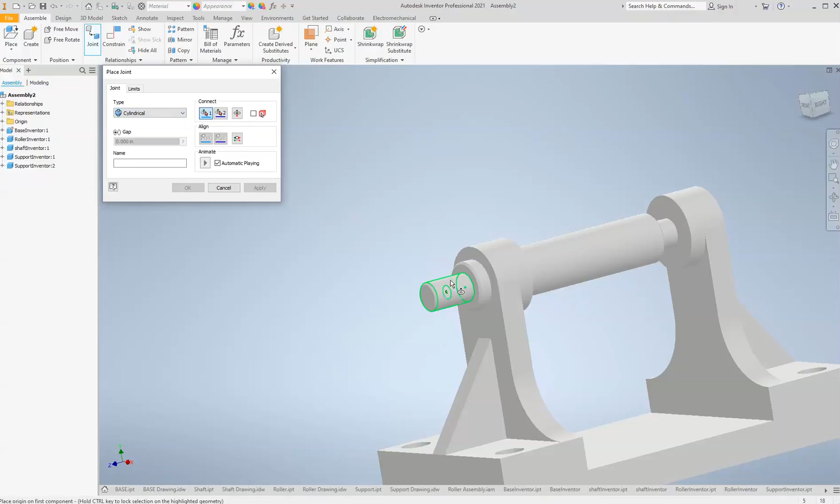We can also use a cylindrical connection here along this, and to be able to see the inside of that, we want to pull this out of the way. Cylindrical connection between this and this. Go ahead and apply.

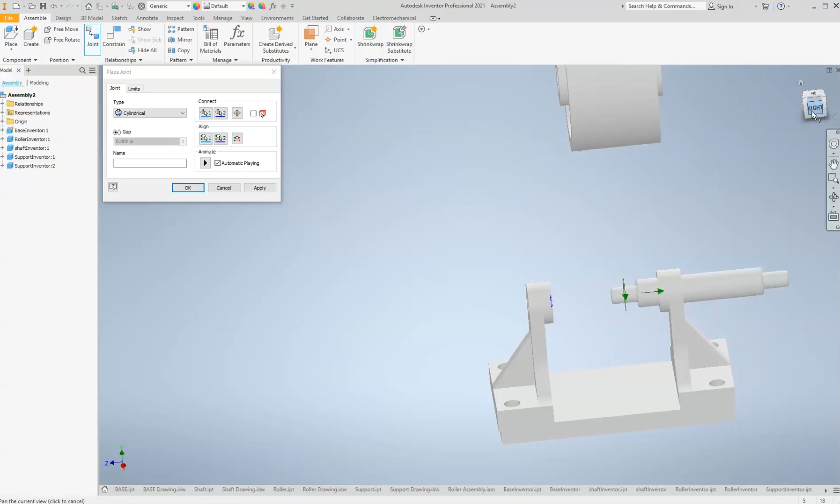So now we can position this between them. We can add a cylindrical joint between this main piece and the shaft and the roller. It just does a little animation there to show you where it can move in and out of. Click apply. Now just add this here.

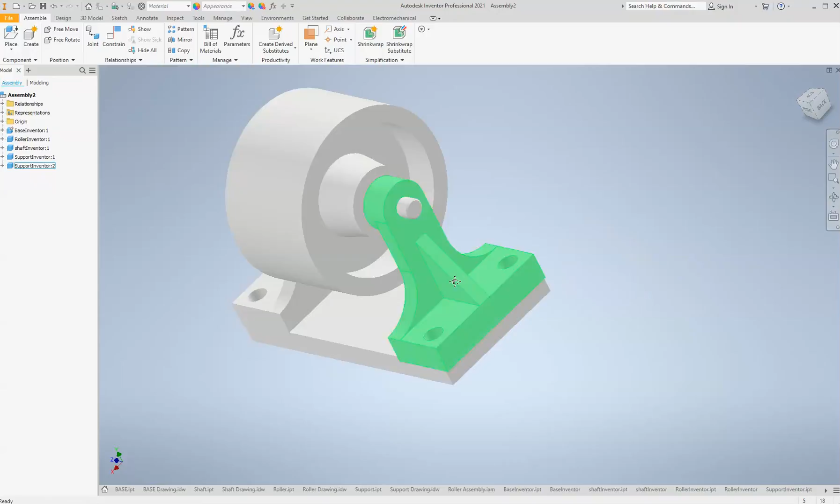So now we can see we have our total assembly, and this tutorial is complete.

The best way to learn how to do this tutorial can help if you follow along, but the best way to do it is to practice yourself. Just grab something that you have in your house, a water bottle or something, and just try to play with the different tools that Inventor offers and see how you can do it. There's far too many tools to be shown in a reasonable amount of time. The best way to learn is to just play with it. Use YouTube and just don't worry about messing it up. We are here to help you through this project.